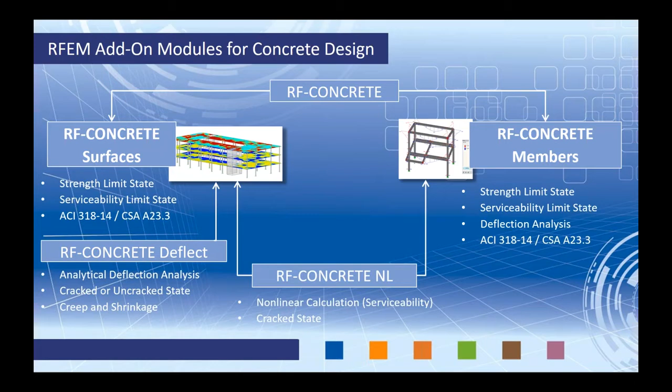And finally, we have the module extension RF Concrete Nonlinear. Now, this is applicable to both the surfaces and members module, and this allows us to run a nonlinear calculation for the serviceability state only in the crack state. So we won't be using analytical equations or factors, but we'll actually come up with the crack section properties and rerun this within the stiffness matrix to account for those nonlinearities. Now, we won't be getting into this today, but just keep that in mind that that is a possibility if you're looking for it.

So we are ready to jump into our example today within RFEM. So for the sake of time, we won't be able to model the structure from scratch, but rather I went ahead and created this two-story concrete building.

You'll notice that we have several surface elements. The surface elements comprise our elevated slabs at both the first level and our roof level, and those same 2D surfaces are also utilized for wall elements, which you can see in the vertical direction.

Surfaces allow you to apply any type of opening within them. This might be some type of garage opening, and we have openings for our doors, windows, and stairs. All of this is accounted for within the analysis.

You'll also see these light blue symbols located at the joints where our vertical walls intersect our elevated slabs. This is what's called a line release. A line release can be placed on any line element within the model, and in particular, we've added them at this joint where the walls intersect the elevated slabs.

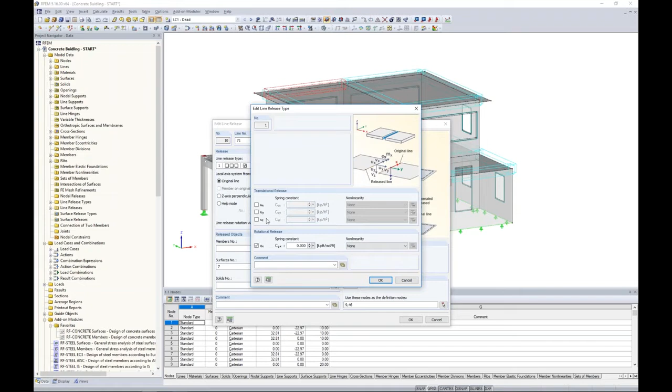If we open up the detail settings, the line release type has completely released the moment, so we will not have moment transfer at that joint. You'll notice we also have translation here in the local X, Y, and Z. Keep in mind these are the local axes of the line element itself.

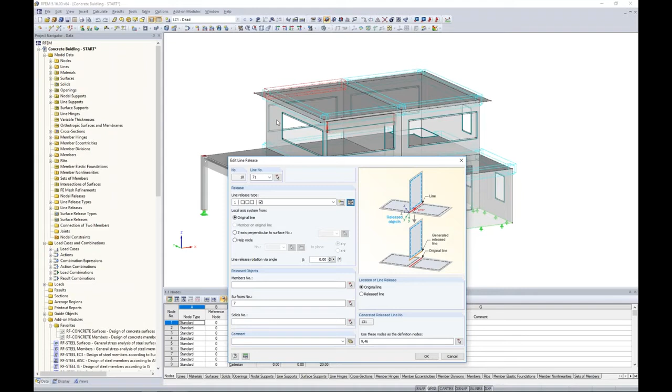We simply apply it to a particular line. We release the objects, and in this case it's surface number 7, which is my vertical wall on the other side. So now we won't get any moment transfer between those walls and the slab elements.

Under the display settings, we can scroll all the way up to the top and turn those off. They'll still be taken into effect in the background, but if they get in our way when viewing graphically, we can turn them on and off within this display option.

Moving on to members, also within this display in our Project Navigator, I'm going to scroll all the way to the bottom. Here we can change the colors in the graphics according to different elements, and the one I'm choosing today is the member type.

The member types are 1D member elements within our software, color-coded because they are different types of members. The first to notice are our columns, which are the member type beam. A beam within RFEM is just any typical type of member, such as a normal beam or normal column, nothing too fancy going on there. That's why these typical columns just have the member type beam.

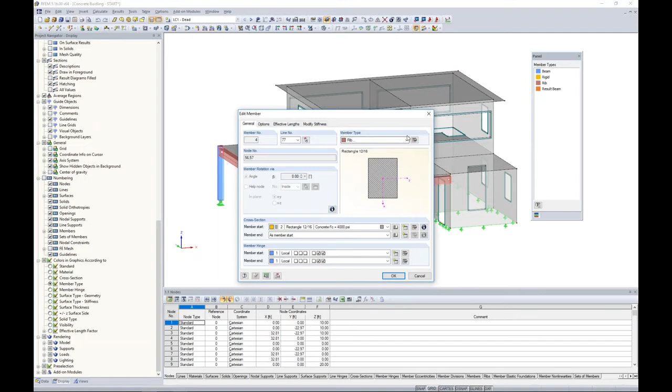Now we have these pink colored members, which refer to rib elements. Looking at a rib element, we can see the member type is set to rib. We can expand the detail settings, and what a rib allows us to do is define the effective width on either side of the beam element with the slab modeled adjacent to it. We can set the effective width as L/6, L/8, or manually type it in.

For this particular member, you'll notice I have a slab on the inside here, hidden behind these dialog boxes, so I've set that effective width to 3 feet, manually typing that in. On the other side we do not have a slab available, so that's set as 0. So rather than being a T-beam, it's more like an L-beam here.

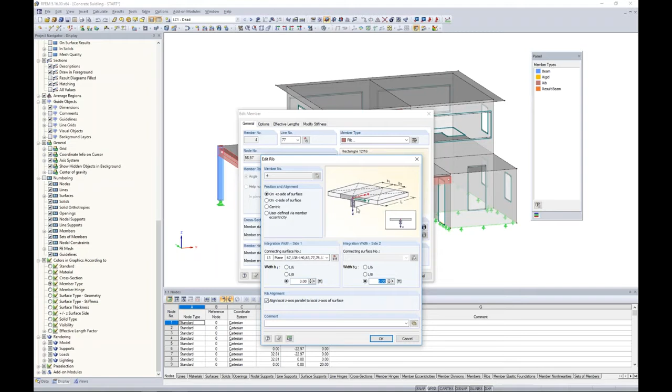We can fully consider the effective stiffness here for the slab element with the beam, and later on we can even design this rib type member in our RF Concrete Members module.

The last type of member I want to point out is something we call a result beam. A result beam is very special in the sense that we're not actually modeling any type of beam member within this model when we're using one. It adds absolutely no stiffness to the structure.

I've placed it above this wall opening, which we can see here highlighted as the wall with the opening, right above it. What a result beam does, if we double click on it and take a look at the expanded settings, is actually integrate the stresses and forces within a cuboid. I've set this cuboid to 2 feet 1 inch in the vertical and horizontal direction, so everything within that cuboid will be integrated and presented to me in a beam-like fashion.

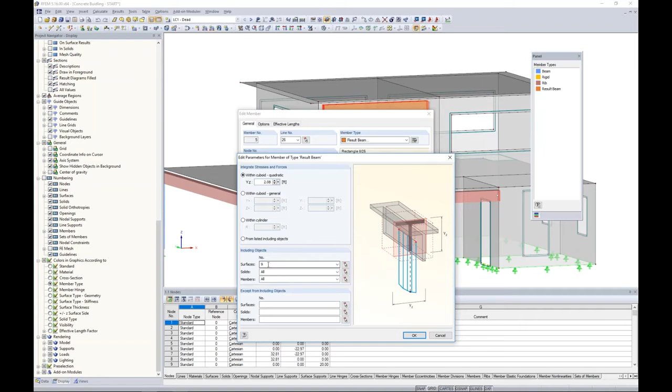We can include only certain objects, so in this case I only wanted to include my wall, surface number 9. So therefore I'll get all of the internal forces, stresses, and deflections above that wall opening, or spandrel as we'll call it, and we'll take this into the RF Concrete Members module later.

Something else to notice about result beams: you don't necessarily have to define it as a concrete member. It could be timber, it could be a steel rod—it doesn't matter because remember, we're not adding any stiffness. But the reason I've set it to a rectangular concrete material for this particular case is because I do want to take it into RF Concrete Members to design it later on, which does require concrete shapes and materials.

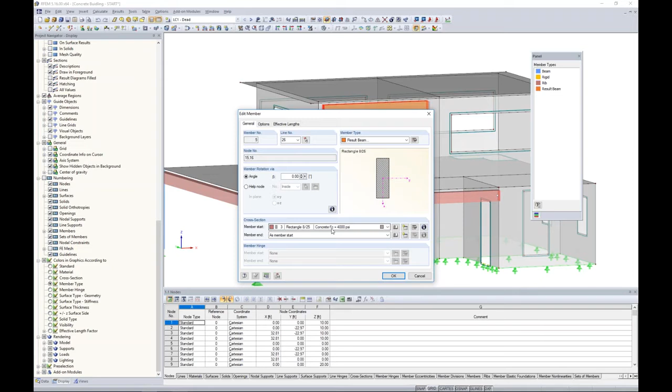Now that we've covered the basics of surface and beam members, I want to talk about I-cracked. I-cracked is simply the gross moment of inertia multiplied by a factor, and this comes directly from table 6.6.3.1.1A within the ACI. The ACI requires us to take into consideration cracked section properties. This factor multiplied by the gross moment of inertia varies for each element, whether it's a column, beam, or surface. By default, the program automatically uses the gross moment of inertia.

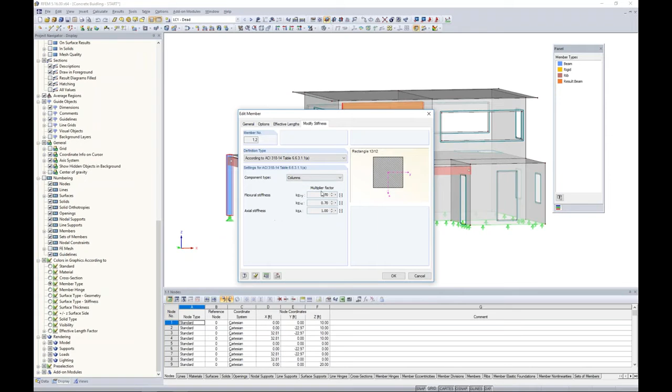So how do we go ahead and change that? Well, you can see here I can highlight both of my columns at the same time and double click them to edit them. Here we have a Modify Stiffness tab. Within this drop-down box, you'll see both the ACI and the CSA because the concept is the same for both standards. Within the ACI, I can use my drop-down box here to select columns, and this multiplication factor, which comes directly from table 6 within the ACI, will be applied to my flexural stiffness. That's how we account for I-cracked.

Now the same thing needs to be done for our rib elements. I can highlight both of them, choose my Modify Stiffness tab according to beams here, and the program is smart enough to recognize what type of element it is from this drop-down. We also would like to do our elevated slabs, so holding down my control key, I select all of the horizontal slab elements, edit the surface, and even for surfaces we have a Modify Stiffness tab according to the ACI for flat plates and flat slabs. We click OK, and last but not least, we have our wall elements.

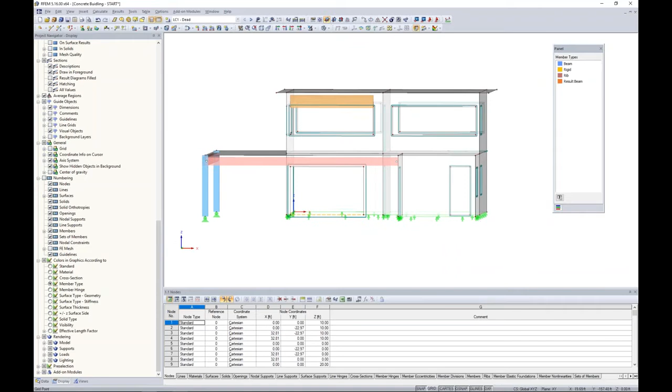I can graphically choose these with my selection box, and right-click to edit these surfaces. Again, under the Modify Stiffness tab, the program gives me the option for walls uncracked or walls cracked. We'll go ahead with walls uncracked for this example today.

Now, you'll notice that I did not apply an I-cracked consideration to my result beam. The reason why is because, remember, we're just creating a summary of the forces and stresses within this wall panel. I've already considered I-cracked for the wall, so there would be no reason to also do it for a beam type element. With that said, if you take a look at the result beam, we don't even have a Modify Stiffness tab anyway to make that change.

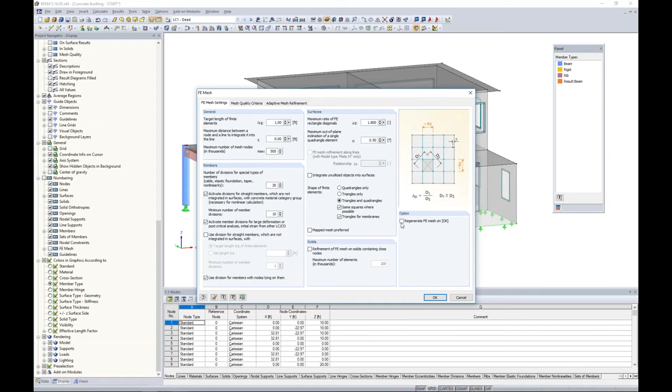Okay, one more concept to take a look at before we look at the loading, and that is our FE mesh. Under Calculate FE Mesh Settings, the global FE mesh by default is set to 1 foot. You can adjust this as necessary, but taking a look at the 1 foot mesh setting for today, we can regenerate the FE mesh, and maybe I'll turn this into wireframe view. You can see the program automatically meshes everything for us—nodes, members, openings, everything is automatically meshed and tied together, so we don't have to take care of any of that manually. Also keep in mind that you don't need to even mesh the model before you run an analysis; this will automatically always be done. I just wanted to give you an idea of what was going on in the background.

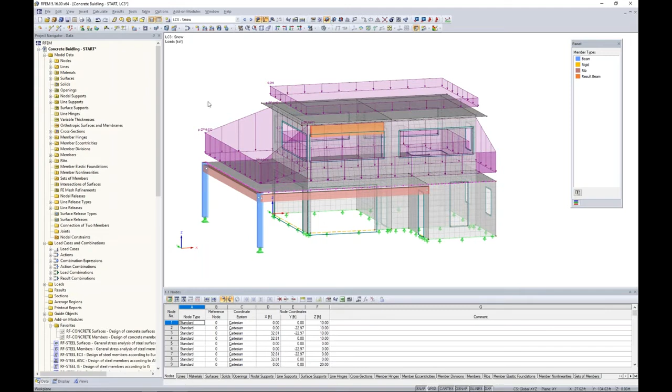Okay, and lastly, let's look at the different loads that I've placed on this structure. I have applied different loads according to dead load, live load, snow load, and so on. When we look at the loads applied to the structure, they're just simple surface loads. For dead load, you can see those acting in the vertical direction on all elevated slabs. Same concept for live load, but only applied at our second level inside the building. Snow load, I've accounted for some high drifts here closest to the wall surface bases, so maybe we're wanting to take into consideration the analysis for high snow loads. You can see those applied here.

Lastly, we have our wind loads. We can see an external pressure being applied in the global X direction, as well as some wind loads, again all surface loads, applied on the inside of our structure as well for an outward pressure. Same concept for wind in the Y direction, except we're just rotating the directions here 90 degrees, so we have a wind in the global Y direction with the surface loads applied.

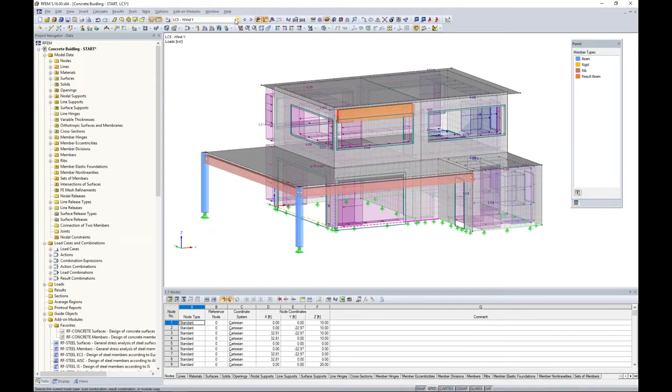Now, jumping to the load combinations, I can open up my load combinations tab. We can see here the program has automatically generated all of my LRFD load combinations, denoted by this orange color, and it has also created my ASD load combinations. Both of these will be used later on for design within the concrete modules.

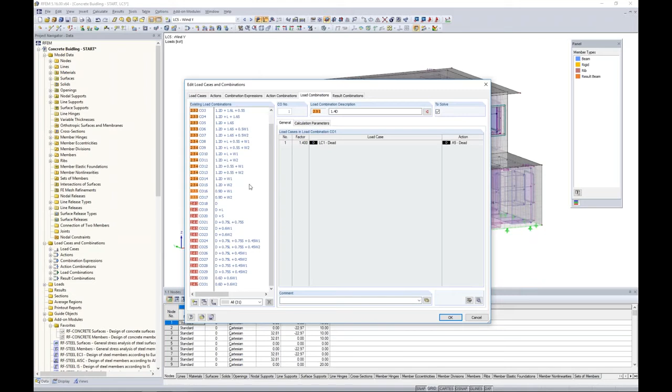If we jump back to RFEM, we'll see all of these same load combinations available in my dropdown, and I can actually see the loads being applied, stacked on top of each other one by one within these load combinations. The load factors are also considered here graphically.

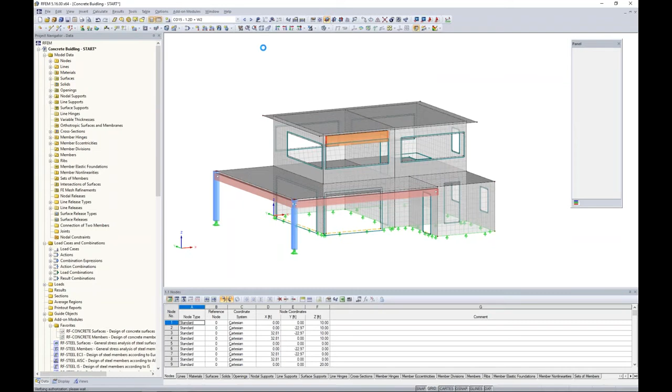So now we're finally ready to run our analysis. What I can do is just go to calculate, calculate all, and the program's going to cycle through first my load cases and then all of my load combinations.

Keep in mind, for load combinations, the default is a nonlinear analysis, taking into account secondary effects such as P-delta. So for every iteration, our stiffness matrix is being adjusted to account for those P-delta effects. We're also taking into account those stiffness modifications from I cracked.

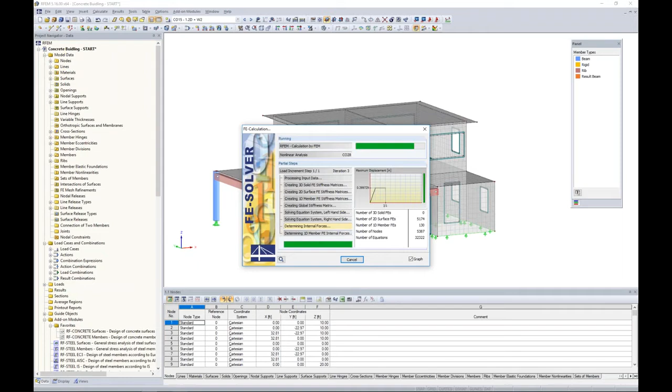Once the analysis is done running, we're presented with our results directly in RFEM. The results are available under the Results tab within the Project Navigator, and we can quickly take a look at our deformations. Turning this into wireframe view, we can cycle through these different load combinations in our toolbar, and for the most part it looks like gravity loads are affecting the structure.

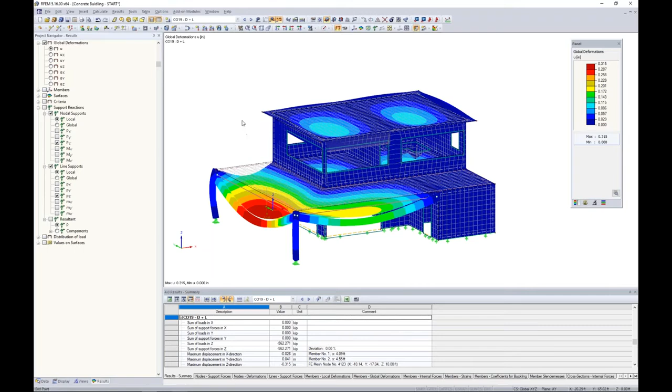Deformations aside, for concrete design we're most likely interested in internal forces, especially for our members. So we can jump to the members tree within our Project Navigator to display the internal forces. For example, I'm looking at the axial loads within my column and my rib members.

We can also take a look at shear loads, maybe we're interested in that for those rib members, and bending moments, of course, which we want to use for our tension reinforcement design, and so on.

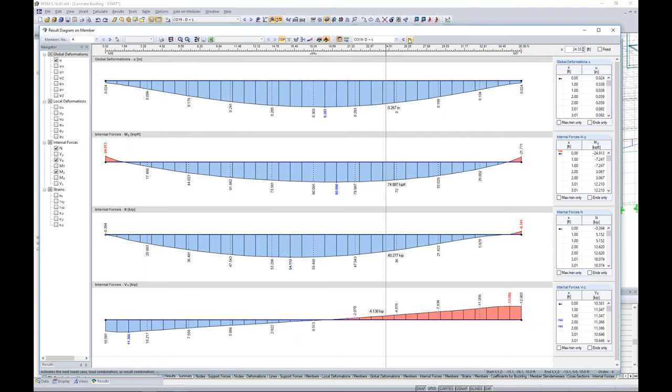We can always right-click on one of these members to go to the results diagram. The results diagram allows us to turn on these internal forces and see a more detailed look at what's going on along the member length. We can also quickly cycle through different load combinations to see how those forces are changing.

The other thing I want to point out is our result beam. Let me create a visibility by selected object of just my result beam. Remember, this is integrating the stresses from my wall element and presenting it to me in a beam-type format—this is actually the area above my wall opening.

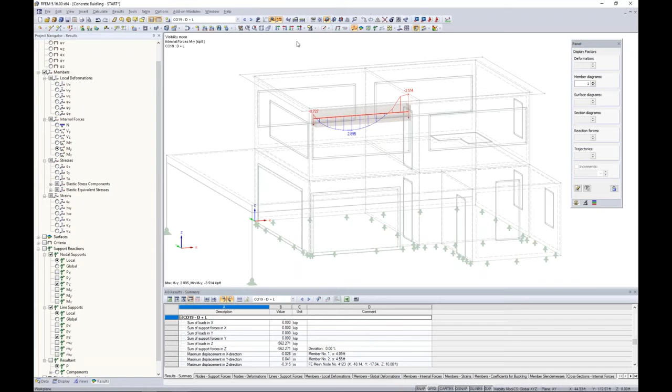I can view normal forces, shear forces, even bending forces all along that wall segment. Again, this is what we could take, not only for the result beam but for all beams, into our own design tools to take a look at the reinforcement design with these internal forces.

The same can be said for support reactions, and let me make this a little more clear here. Our support reactions are given to us within this results toolbar, and we can take this into our own design tools to do the foundation design if we'd like.

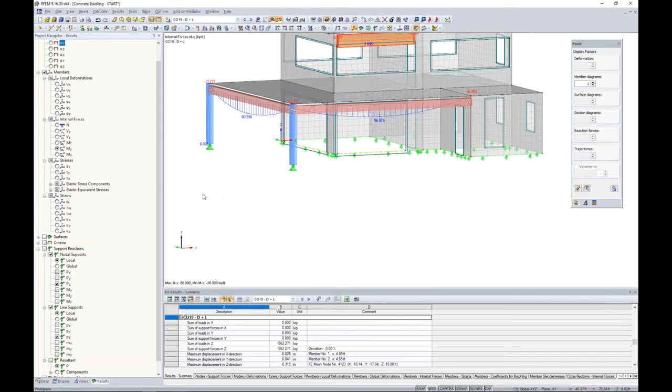So that really summarizes our analysis. Again, I haven't touched any of the add-on modules—this has all been done in RFEM alone, which provides us with a full analysis.

Now we want to change topics and jump to reinforcement design utilizing these add-on modules within RFEM. Going back to my data tab, we can see here the long list of add-on modules available.

This is why we have the concept of 'pay for what you use,' because not all people are going to utilize all these add-on modules. Well, we can always right-click and move a module up to the top of the list by selecting it as our favorite.

Also, under the add-on modules option at the top of the screen, they're categorized a little bit better, so we can see design by concrete and launch the RF Concrete Members module.

Now, when I say add-on module, it's nothing more than a dialog box available within RFEM itself. All of my loads, my load combinations, my cross sections, my materials are all brought in from RFEM, the main program, into this add-on module.

The only thing we need to define here is a little more information about our reinforcement specific to the ACI standards, so that the program can go ahead and design that for us. The first thing to note here is we want to choose the standard.

So you'll see in this drop-down box we have both the ACI and the CSA standard, as well as Eurocode and a couple others. We'll choose ACI for today.

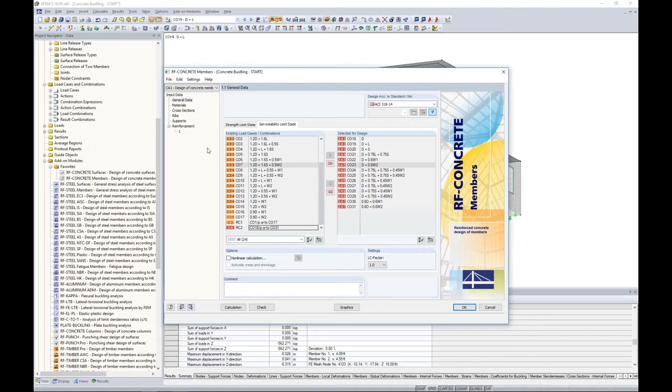Now we just simply need to move down our list here from top to bottom. So moving on to materials, concrete 4000 PSI is brought in from RFEM. Our reinforcing steel is set to grade 60. Material properties are all given to us here, not too much to change.

The cross sections, same concept. These are my cross sections directly from the RFEM model. Now I know it's a little difficult for you guys to see, but as I click through these different cross sections, they are being highlighted in the RFEM model behind me, so I can see exactly which cross sections are located at which parts of the model.

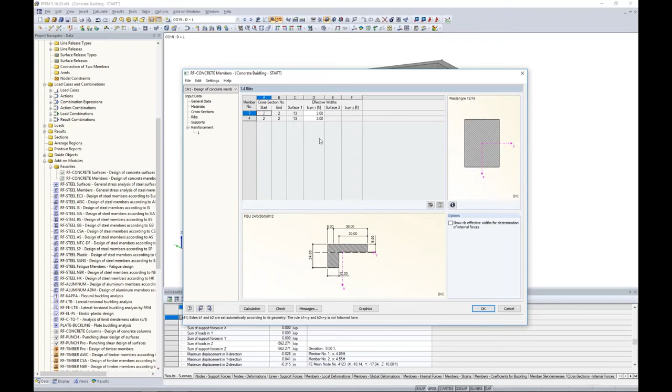The ribs tab is those rib members that we created with the effective width. So remember, I defined an effective width of 3 feet only on one side of my rib member. That's all brought in from RFEM. Now this is important because we can do the reinforcement design of this effective width section here.

The supports tab is utilized by first graphically selecting here a couple nodes. So I'm going to choose both the nodes at either end of this rib beam here in the front of my structure. The reason for that is I want to define my support width, which in this case are my two columns. My columns are 12 inches wide, so we can type in 12 inches for the support width.

Is the column a direct support? What's nice is that this picture updates to let you understand exactly what you're selecting. So is the column underneath the rib, or is the rib framing into the face of the column? In our case, we'll assume the rib is framing into the side of the column.

Is it a monolithic connection, yes or no? And is it an end support? In both of our cases, we'll choose this as an end support. So the intent of this table allows us to reduce the shear forces in the support area according to ACI 9.4.3.2.

The code tells us that we can actually consider the rib element at the face of the column, or even more so a distance D away from that face, D being the depth of the rib. So the shear forces at that location will be used for the shear reinforcement design. The ACI allows us to do that, so in order to not over-design the shear reinforcement, we can activate that option here.

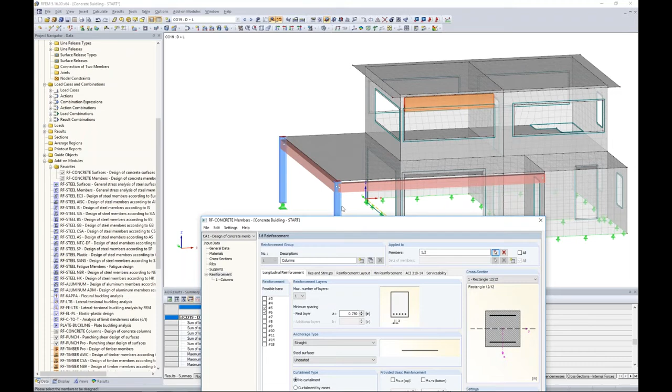Our rib member is going to have significant bending at the center, but much less bending at the end. So what you can do is set different curtailment so the program can optimize where to put that longitudinal reinforcement in different zones. The option for no curtailment will use the same longitudinal reinforcement throughout the entire length of the beam.

Ties and stirrups, same concept. We just want to choose the possible bars here. For these columns, I'm going to choose number 3s, and we're going to use uniform spacing throughout, which is the default option. Now, the program can also take into consideration the max stirrup spacing according to the ACI standard, so it will either flag us or design it to make sure we're not exceeding that particular code check within the ACI.

The reinforcement layout. The first thing to set here is the concrete cover. The ACI standard refers to table 20.6.1.3.1 for concrete cover, and for number 5s or smaller that are exposed to weather, the code tells us that 1.5 inches is adequate. So assuming we're using number 5s here, we'll just keep this as the default of 1.5 inches. If the program came up with number 6s for my reinforcement, maybe I'd want to go back and adjust this to something more like 2 inches.

The reinforcement layout. Remember, we're designing our columns here, so a reinforcement layout shown in this picture on the right is not ideal for a column. We're going to have something more like biaxial bending, we could bend about either axis. So we want to certainly make sure we have bending reinforcement on every face. For that, we can use this drop-down box to choose the option uniformly surrounding. This looks much more efficient and effective for a column member.

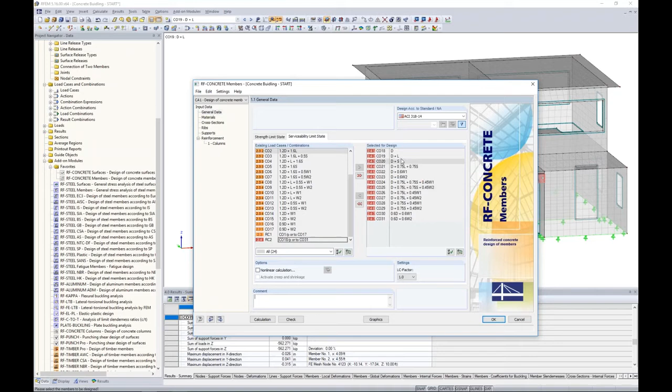Now, lastly, we have our Serviceability tab. Keep in mind, this Serviceability tab is only available because back under the General Data tab and the Serviceability Limits, I've actually utilized my ASD load combinations. If I did not have load combinations over on the right side of this dialog box, I would not see this Serviceability tab. But today we are designing serviceability according to the ASD load combination.

So there are two considerations when it comes to serviceability: cracking and deflection. With cracking, the first thing to specify is the limit value for allowable crack width. Utilizing this first option, limit values, my drop-down box has a few default options, and this comes from the ACI committee's research, putting together recommendations depending on where your structure is located and how it's going to be used. For example, water retaining structures are going to have a significantly lower allowable crack width of 0.004 inches compared to a structure with a protective membrane or located in a dry air environment.

For today, let's assume cracking is not such a concern for this structure. We're in a very dry environment, we don't expect to see very much cracking, so we'll just set the limit values as 0.016. Now, user defined, you can manually type in the allowable crack width as well.

Below this are two different checkboxes: design without direct crack width calculation according to Chapter 24. The ACI does not specifically give us any type of equation or reference when it comes to the actual crack width. Instead, it tells us that we must limit the reinforcement spacing in order to control cracking. So by leaving this checkbox checked, we will check the spacing of the reinforcement to make sure we're adhering to the ACI standard.

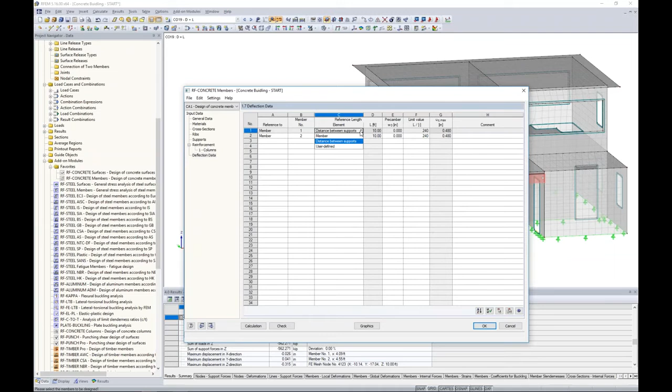Under the deflection data, not much to do here because the program already recognizes that we need to add both columns to this table, member 1 and member 2. The reference length is set as the distance between the supports, the full 10 feet. You can also modify this with these drop-down options. If we had a pre-camber, we could put that in.

And finally, the limiting values. The drop-down box has a few options directly from the ACI standard, or you can type in your own user-defined value. Utilizing L/240 again from the ACI, I'm telling the program that I cannot exceed a deflection of 0.48 inches. So it will compare the demand deflections from our analysis to these limiting deflections and give us a capacity ratio for serviceability.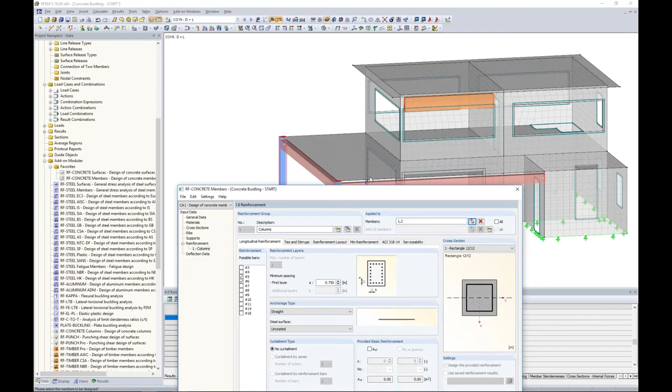So that was a bulk majority of our input information within this module. Now keep in mind, this is only for the columns. So what I'd also like to do is design my ribs and my result beam at the same time. We can do all of this in one continuous step by simply creating a copy of my reinforcement group.

So now my columns are defined here twice. All I need to do is go to a second group, and we'll rename this to ribs. Now for the members, I need to graphically choose my rib members that I'd like to apply this to. As for the rest of these tabs, most of this will remain unchanged.

For example, the longitudinal reinforcement will still let the program optimize between number 5s or number 6s. The ties, maybe I'd like to increase this to number 4s. I expect to see higher shear here, of course, in comparison to my column, so we'll increase this to number 4s.

And let's use different zones. So the program will optimize the spacing in 3 different zones. Areas where we have higher shear will have closer tie spacing. Areas where we have lower shear, of course, will have further away tie spacing.

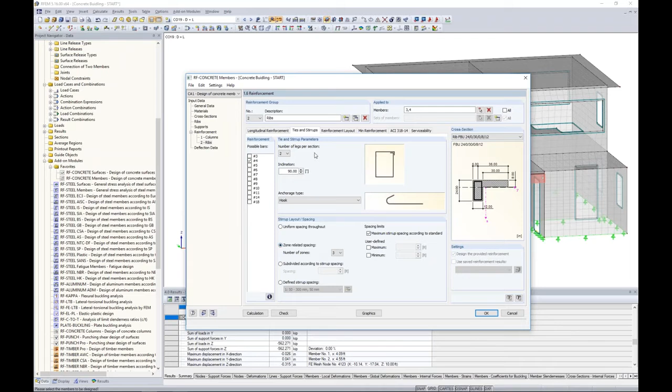The reinforcement layout, the cover is fine, but the reinforcement layout is not correct. We certainly don't have a column situation where we need uniformly surrounding reinforcement. So instead, we're going to choose symmetrical distribution.

You'll notice now we're giving reinforcement at the top and at the bottom, which is more beam-like behavior. For rib elements, we now have the option to distribute the reinforcement over the complete slab width. So we're also going to extend this longitudinal reinforcement over the effective width of our slab.

So it's pretty powerful in the sense that we can design these rib elements directly within this module too, taking into account that effective width that we input in the RFEM model.

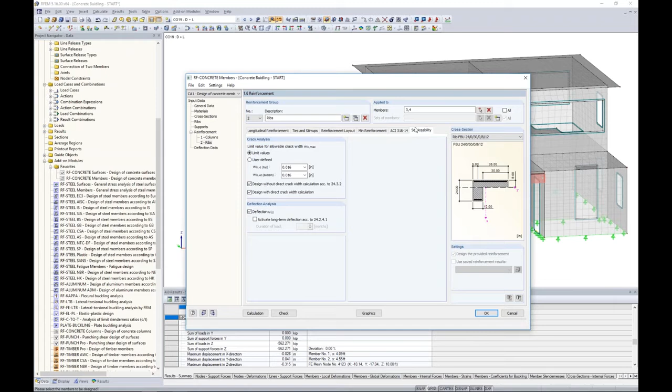Now, as for the rest of these tabs, essentially we can leave everything the same. Even for serviceability, if I go to my deflection data table, members number 3 and 4 were added. My allowable deflection will now be around 1.5 to 1.7 for these rib members, simply because they are longer members.

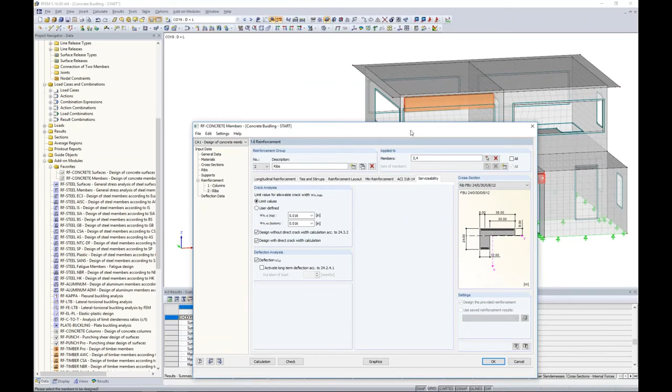Okay, and finally, we have our result beam up here. Now remember, we're just designing the upper portion of this wall above the opening as a spandrel, and we do so by mimicking that it's a beam type element. So creating a copy now of my rib reinforcement group, you can see here now I have columns, ribs, and my third option, we can rename this to spandrel.

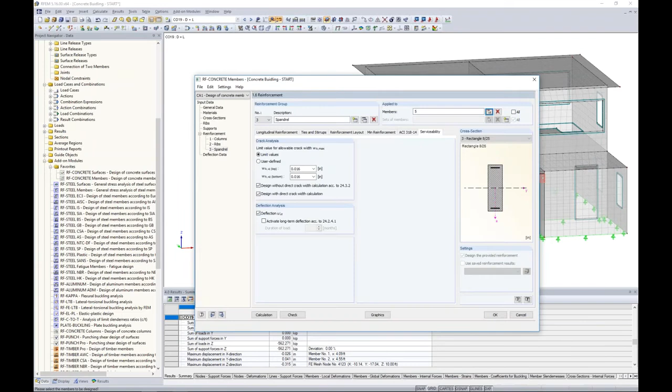Here I can select my member, my result beam graphically within the RFEM model. And jumping back to my longitudinal reinforcement, this looks fine. My ties and stirrups, maybe we'll jump back to number 3s here with uniform spacing. Everything else remains unchanged. Even the reinforcement layout, by the way, will look the same as our rib members, but our cross section was updated here, with top and bottom reinforcement.

The only thing I'm maybe not so concerned about is my serviceability with deflection consideration. You can uncheck these options for different reinforcement groups. So I still want to check out my cracking, but I don't really care much about my deflection. I can simply uncheck that, and now that member will not be included in the deflection data table here.

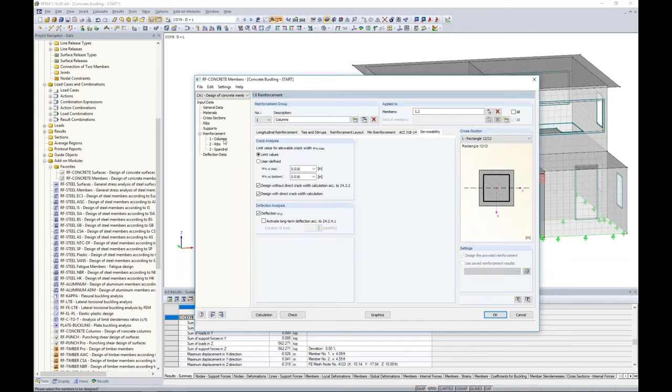Now we've finally defined all of our reinforcement settings for our members, and we can run a calculation. All this is doing is pulling the internal forces from RFEM into this add-on module, applying the ACI equations to give us our actual reinforcement details for each member. And you can see it solves fairly quickly.

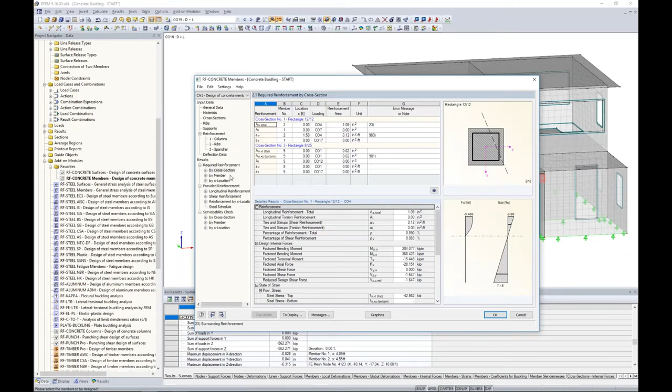So now we're presented here with our results in table format. The required reinforcement is given first here, and we can check it out by member. Again, these tables are synced up in the background with the RFEM model, so we can see exactly where we're at within this structure.

Taking a look at our rib members in particular, we'll see the required reinforcement based on the applied loads for the AS top given as such. Now AS bottom, this is all longitudinal reinforcement. We're also given our requirements for shear reinforcement and torsion.

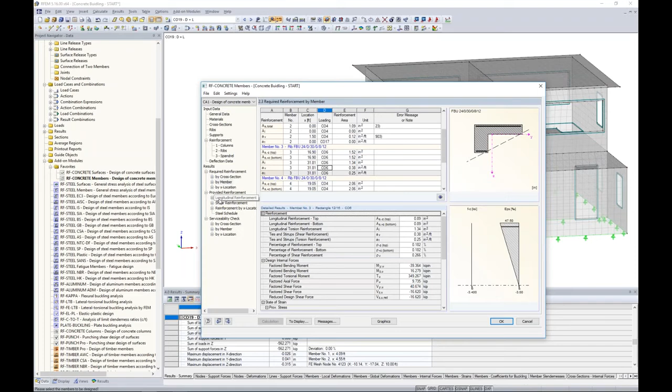So required reinforcement is nice, this is good to know, but rather we're probably interested in, well, what rebars did the program lay out for these particular members in regards to the settings we previously defined? Well, this is where the provided reinforcement tables can be useful. Here we can see these same members defined.

For example, we're taking a look at the longitudinal reinforcement for my columns. I can take a look at my rib members here, and we can zoom in to see the longitudinal reinforcement applied at the bottom, at the top. Shear reinforcement, same concept. We can see our ties, our stirrups placed along the member length, 31 number 3s at 4 inches on center.

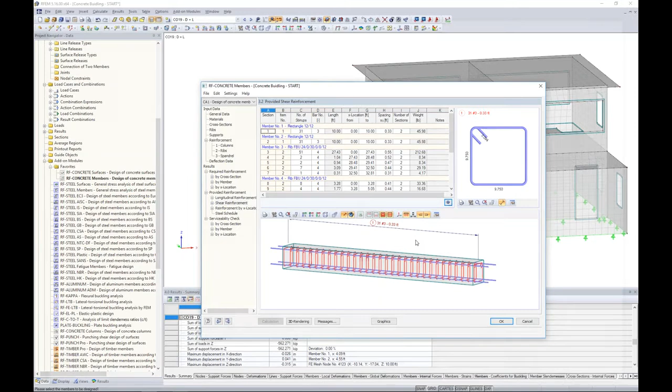Now, for these 3D drawings, you can always double click on it, and up pops a nice rendering here of exactly what our reinforcement looks like for both the longitudinal and the ties. If you want to make quick changes, for example, I really would prefer to use number 4s rather than number 3s.

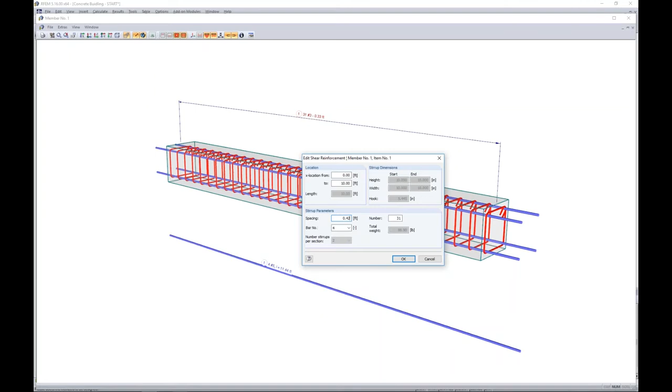I've decided, well, I don't necessarily have to go back to my original input data. I just simply double click on this call out here, and I can change the bar number to number 4s, and maybe I increase my spacing to 0.425 feet on center. I click OK, and the program automatically updates the picture.

I can exit out of this picture, and when I click into another table, the program says, wait a minute, you made a change. I need to quickly recalculate this to make sure you're still meeting all the ACI limitations.

So I've made that change to my shear reinforcement for my column. It's reflected here with 24 number 4s, but I am getting a note now, which I can read either under my messages or down here in the lower dialog box. It says the bar spacing is greater than the maximum spacing, so that's telling me something is not adhered by the ACI standard. So maybe I need to go back to my number 3s or decrease my settings there.

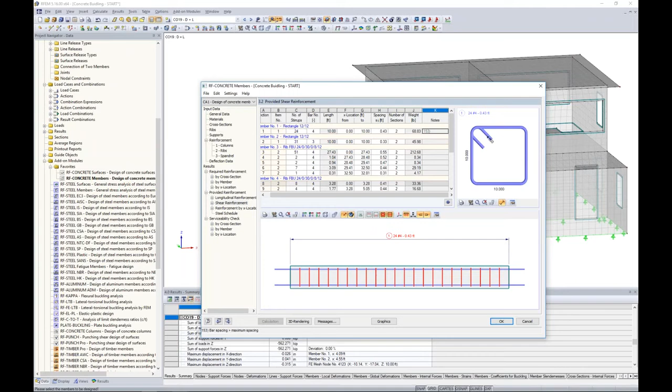Now, lastly, we have our serviceability check. Remember, we were checking deflections. We were also checking the spacing of our reinforcement and the crack width. So ultimately, for our different cross sections and members, we're getting a capacity here for serviceability.

It looks like in this case, the deflection is controlling at the mid-span, denoted by this big red arrow for our rib member, and we get a serviceability check of 0.94, but we're still less than 1.0, so we get our nice green smiley face here.

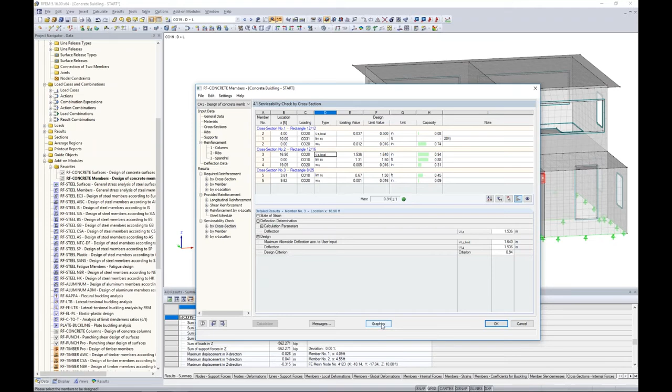So the tables are nice, but it's also beneficial to see what's graphically going on within our module or within RFEM. What we can do is click on the graphics button down at the bottom, and now we are back within RFEM, but we're still technically in this add-on module. You can see that we're in RF concrete members, so this is all my reinforcement results details from the module.

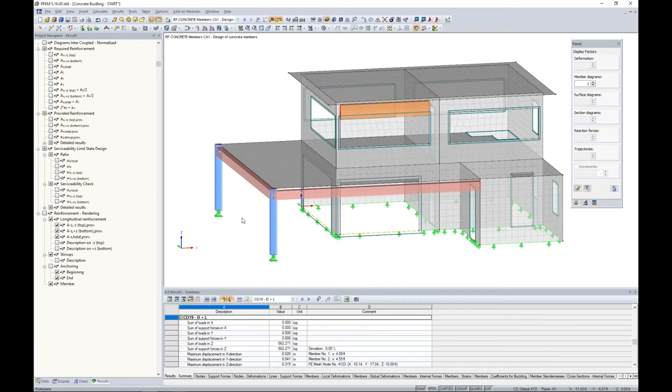Now, focusing in on a rib member, for example, we'll highlight it and create a visibility by selected objects. Let's turn this into wireframe view and zoom in here a little bit. For this rib member, we can display a diagram of our required reinforcement at the bottom of this member. So this member is in positive bending moment. We need reinforcement on the bottom, obviously, up to 2.06 inches squared per foot.

So that's just the required reinforcement. Well, I can overlay on top of this the provided reinforcement. This is what the program has determined to put into this beam member with our number 5s, and it comes out to 3.88 inches squared per foot. You can see here that the provided reinforcement should always be greater than the required reinforcement, otherwise we should be a little concerned with our concrete design not meeting the minimums.

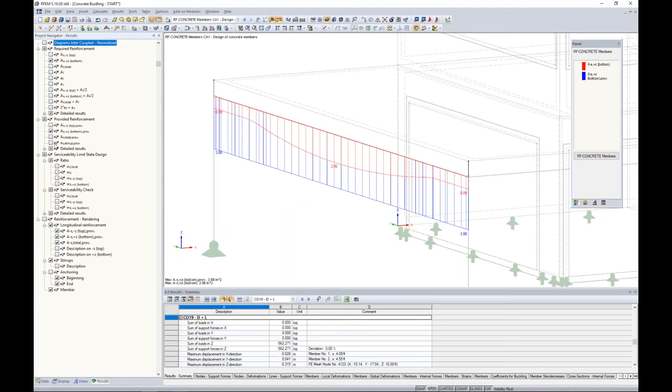Now you can go ahead and display all these different diagrams. What's also beneficial is we can display the rendering of the reinforcement for both the ties and the longitudinal reinforcement directly within the model. So we can see here, even with these rib members, we're able to see the longitudinal reinforcement within the slab. Shear spacing, our three different shear spacing zones are displayed here. Now any of this can be added to our printout report for recommendations on how the overall rebar reinforcement design will be done.

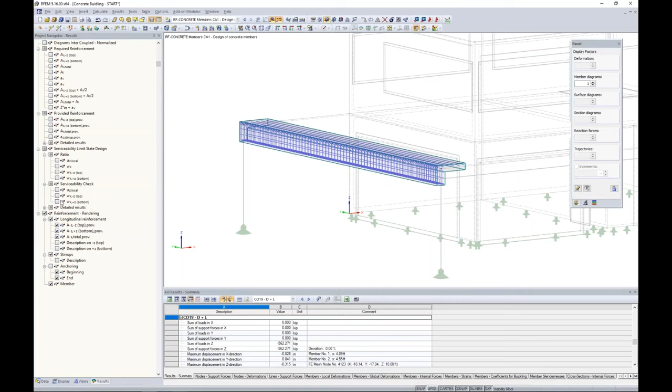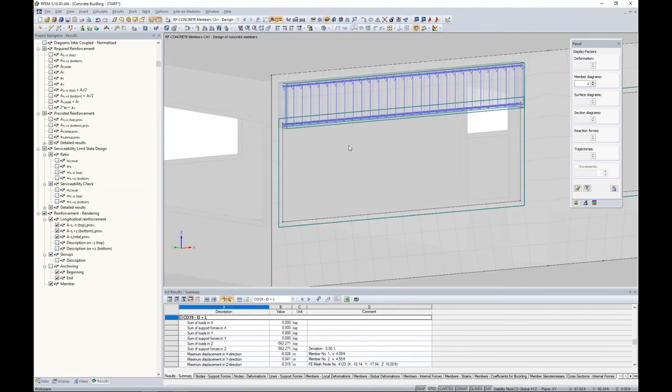Okay, so the other thing to quickly point out is remember our result beam. We're going to cancel out this visibility mode, and maybe we highlight our result beam here along with our wall panel, create a visibility by the selected object. So here we can actually see the reinforcement above that wall opening. It was designed like a beam member, so we have our longitudinal reinforcement shown here, and our stirrup shown, and this is all meeting the design demands of this wall panel above the opening. So again, this is how result beams can be utilized along with surfaces.

Okay, so now we have completed the member design. We're also interested in the surface design. For this, I'm going to cancel out my visibility mode, and we'll turn to the normal view here of RFEM, and we'll jump to RF concrete surfaces.

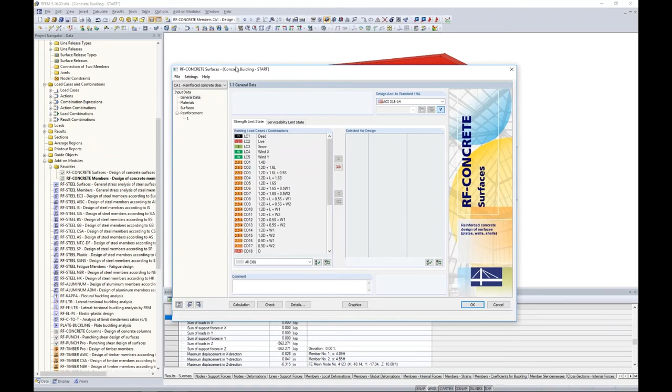So this is our second add-on module today. Now this add-on module is truly almost identical to RF concrete members. Once you grasp the handle of one module, you'll certainly understand what's going on in the other.

We're going to choose the ACI standard from our drop-down box here. The strength limit state design, we will choose our LRFD load combinations, and for serviceability, we will choose our ASD load combinations. Under the serviceability limit state, this is where we can go into these edit settings and activate the RF concrete deflect module.

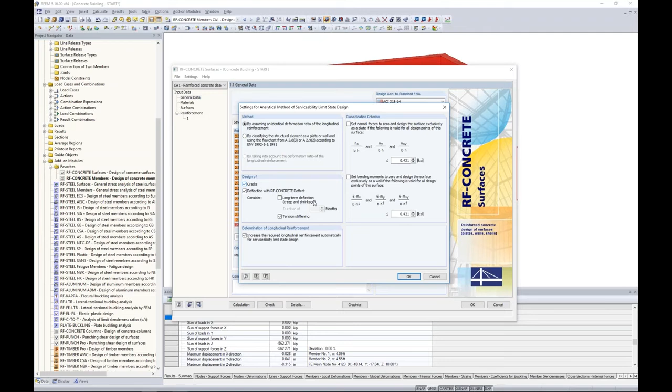So this is the module extension that allows us to check deflection considerations for our 2D surfaces. Now you can also activate long-term deflection or turn it off here, and the design of cracks will also be included. We also can get into nonlinear analysis with the module extension RF Concrete Nonlinear, which we won't be doing today, but this is where you also activate it for the serviceability limit state design.

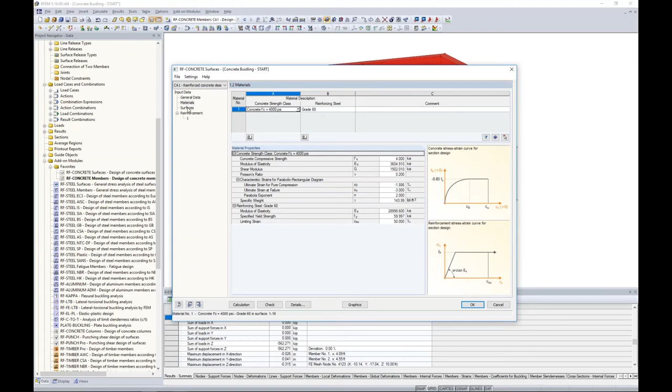So again, just moving from top to bottom with our tables here. Our materials, 4,000 PSI, grade 60 reinforcing steel, everything looks great there. The surfaces table is really effective for our serviceability design. This has information on our deformation and crack widths according to the surfaces.

So the first tab here, deformation analysis, is only available because I have activated RF Concrete Deflect. Here we type in our limiting deflection ratio. You can see the default is set at L/250, so I can manually change this deflection ratio here as well. As far as L, this will be measured by the minimum boundary line, the maximum boundary line, maybe a user-defined value, or what I'm going to do in this case is tell the program I don't want any deflections of my slabs or my surfaces to exceed 1.0 in this case. So that's the absolute deflection here. Now you can individually set deflection ratios for each surface, or you can apply them all at one time.

The limit of crack widths, this should look very familiar. This is exactly what we just saw with the RF Concrete Members module. We can set our limiting values here according to the ACI committee for a dry air structure of 0.016 inches. We can design the reinforcement with spacing considerations according to Chapter 24, as well as run the Gergely-Lutz equation to give us our actual crack width and compare it to the limiting value set here.

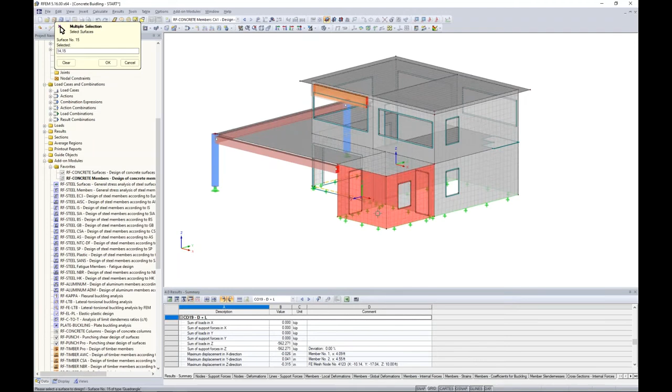So nothing different here. Moving on to reinforcement. The first thing we want to do is again define our reinforcement group. We're only going to have time to do our walls today, but keep in mind the design of the elevated slabs is identical to what I'm about to show you. You just can create a second reinforcement group if you'd like. So this is not going to apply to all surfaces, but rather I'm just going to design these two outer perimeter shear walls here. So we can select them graphically, surfaces 14 and 15, and I click OK.

The reinforcement ratios have some default settings here. For example, maximum reinforcement percentage is set at 9%. The ACI standard actually tells you that for surface reinforcement, we're more concerned with the strain being less than 0.004 rather than a specific percentage called out. But you can adjust this percentage as a user in order to make sure we have a strain that's below what the standard tells us to.

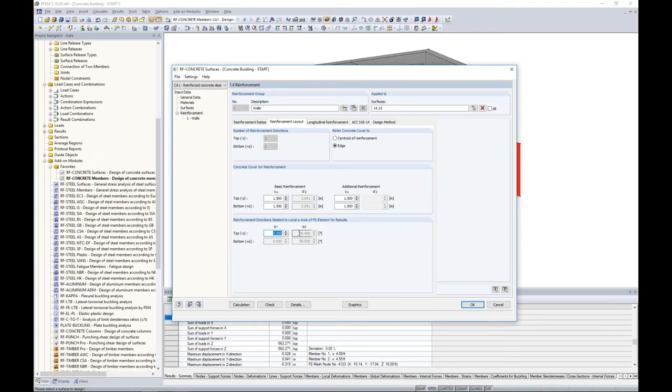The reinforcement layout is to specify the cover. I'm going to specify the cover from the edge of the slab or the edge of the surface to the edge of the rebar. And for this, just like my concrete members, I'm going to set this all as 1.5 inches. We will design both transverse and longitudinal reinforcement for surfaces. If you have any type of specialty structure where you don't have a complete 90-degree angle between those two directions, you can adjust this angle to something else, so it doesn't necessarily have to be 90 degrees.

Longitudinal reinforcement for my wall elements - I know I want to apply number 5s at 12 inches on center. That is my provided basic reinforcement I'm going to put in here. I can input that information for the top and bottom as well as the diameter of my rebar, but we can also utilize this helpful tool. With this tool, I can choose all options for top, bottom, and both directions. I can specify my number 5 rebar diameter, which is 0.625 inches, and set my rebar spacing as 12. Once I click OK, the program will automatically calculate my reinforcement area and set my diameter according to those settings, so nothing further to do with my number 5s at 12 inches.

Now these next two settings are interesting. The program is going to first run through the ultimate or strength limit state design. If it determines my number 5s at 12 inches are not adequate, it will automatically increase this reinforcement - this will be our new required additional reinforcement. Once the strength limit state design is done and we move on to serviceability, what do you want the program to use? Do you want it to use our number 5s at 12, or the required additional reinforcement? All of those options are available within this drop-down box. I'm telling the program, if number 5s at 12 are not adequate, let's use whatever the program suggests I need to additionally add to these wall segments. Same thing with the check of shear resistance - apply the greater value from either the required or provided reinforcement.

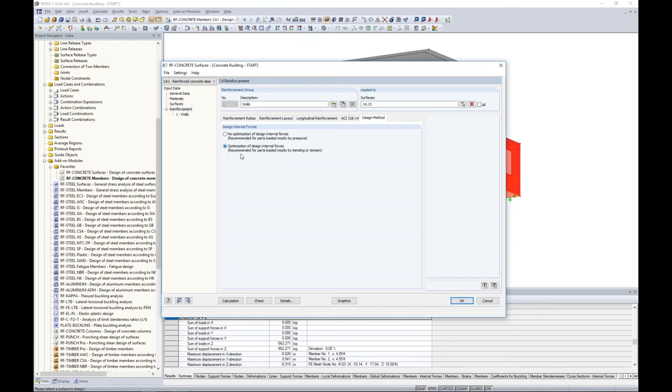The ACI tab just has some references directly to the standards. For example, we want the minimum longitudinal reinforcement for walls according to Chapter 11. Minimum shear reinforcement is given here, as well as the nominal shear strength of our concrete according to Chapter 22. Strength reduction factors from Chapter 21 are given by default directly from the ACI, but you can adjust those here. The design method - we'll leave this as default. We have optimization of design internal forces, and the parentheses gives you the information you need: this is recommended for parts loaded mostly by bending or tension, in comparison to parts loaded by pressure, so we'll leave this option here.

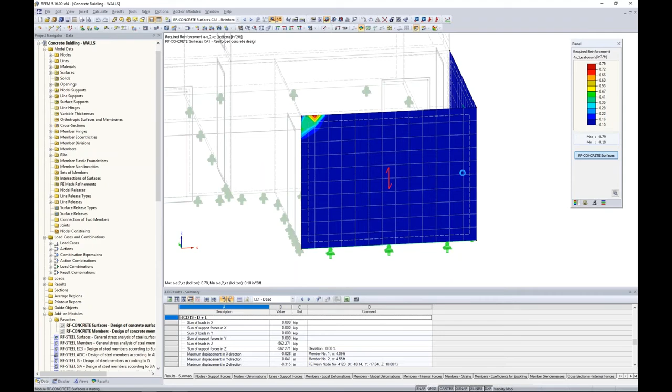Now we're finally ready to run our calculation. For the sake of time, I'm going to jump to an already solved model here, because we do have several FE elements now, which is much different than our members, so it takes a minute to solve. For the sake of time, we'll jump to the results, which are provided to us within this add-on module with the results tables.

The first thing I want to look at is required reinforcement by surfaces. Once I run my calculation, I see my 2 surfaces listed here. The first one is surface number 14, on this far side back here. Surface number 14 shows me my required reinforcement within this column - this is just what's required based on the applied forces, no problem. Basic reinforcement is my number 5s at 12 inches - this is what I told the program to input for the basic reinforcement. My third column is all zeros, because my number 5s at 12 inches are completely adequate for this particular wall, so I don't need any additional reinforcement. My number 5s at 12s are fine.

I could maybe even consider increasing the spacing or decreasing the bar size to be a little bit more competitive here.

Now, looking at wall segment number 15, it is a very different story here. Looking at the required reinforcement, I have values clear up to 0.95 inches squared per foot. That's a whole lot of reinforcement.

So my number 5s at 12 inches listed in my second column here are not even going to be close to this. In my third column, the program's telling me you need to put quite a bit more reinforcement into this wall. Then if I take a look at my shear reinforcement design, the program's giving me a not designable message. It says down at the bottom, the shear resistance cannot be checked. The cross section is entirely cracked.

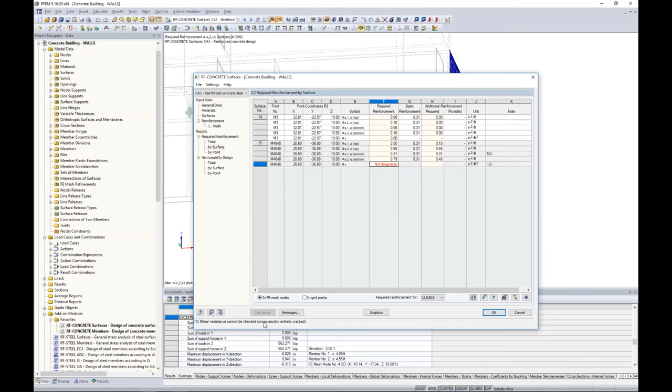Well, this raises a red flag to me. These two wall panels are very similar. Why is wall number 14 passing with flying colors? Everything is totally content with the number 5s at 12 inches, but then when I look at number 15, it's not even close. It's failing by quite a bit.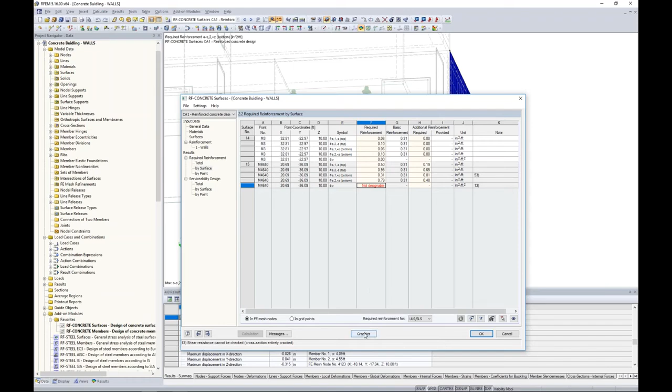So this tells me that I need to maybe take a look at my graphics within the RFEM model here to see what's going on. Remember, I'm still in this add-on module, RF Concrete Surfaces. I'm just viewing my results graphically here back in RFEM.

So we'll take a look at our required reinforcement, which I can choose within my tree here. Now I'm viewing the required reinforcement for both the top and bottom and in both directions. We can see the direction indicated by the red arrows there. You'll notice as I cycle through these, the wall panels themselves, for the most part, require very little reinforcement.

But we definitely have a problem up here in this corner. Very, very high reinforcement is required. So this tells me that we have an issue called a singularity.

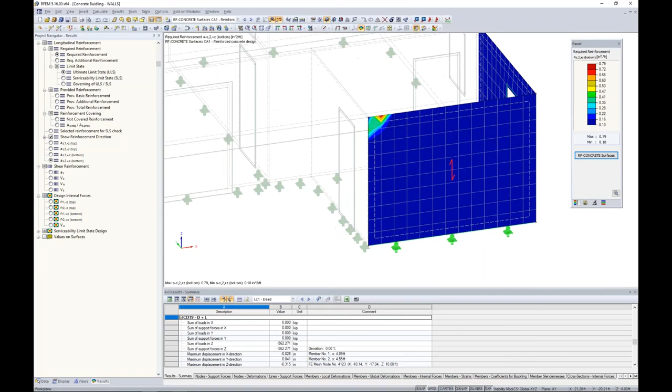Now, if we look at this corner here of this wall panel, we have this additional wall panel framing in from 90 degrees. Remember, we have our rib member framing in all to this teeny tiny FE mesh point in the corner. Well, in reality, this is not just an issue within RFEM, but with all finite element analysis software, that the load isn't going to be distributed at this one single little mesh point, but rather we're going to have better load distribution in real life.

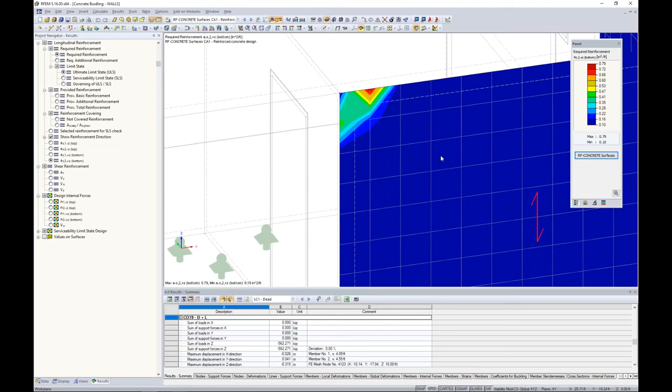So what can we do in our model to take care of these high peak areas? Well, the first thing to know is that my FE mesh elements here are pretty large at 1 foot. So maybe I want to refine my FE mesh at this corner point.

Well, I can do this by right-clicking on the node. I can edit or create a new FE Mesh Refinement. I choose the definition type here, and you'll notice the program already chooses the node option because that's what I've highlighted in the model. I'm going to give the FE Mesh Refinement a radius of 3 feet.

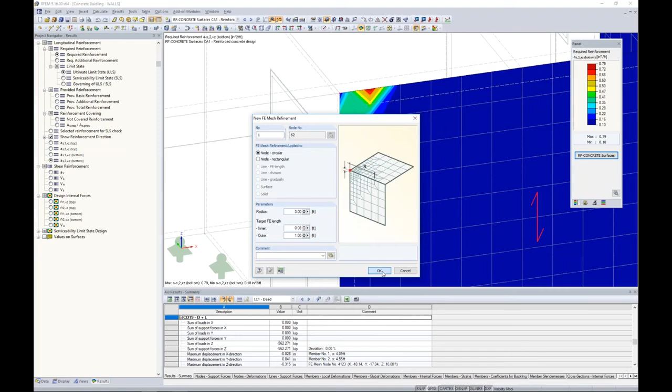Now, on the inner side of this FE Mesh Refinement, I want 1 inch. And then as the outer mesh refinement, I would like it to transition back to my global settings of 1 foot. And I click OK. The program tells me it needs to clear the results.

So now we're presented with this FE Mesh Refinement symbol here. I can go to Calculate, Generate FE Mesh, and maybe if I hide my objects in the background, we zoom in here, we can see that the FE Mesh is much smaller at this corner now. Then it transitions nicely back into that 1 foot setting. So some nice automated features here.

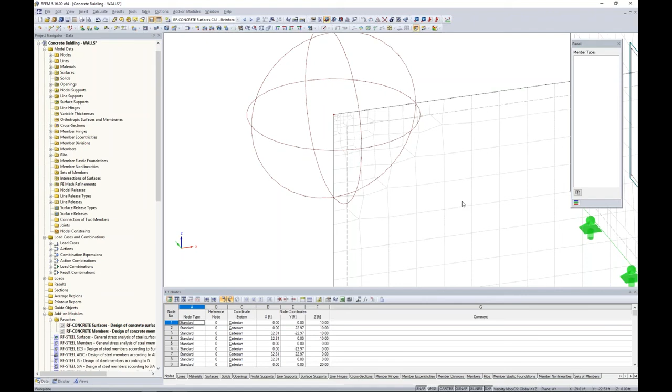But because we've completely changed the FE Mesh, the program does need to rerun the analysis way back in RFEM. Our internal forces are inevitably going to change when we make changes to our FE Mesh. So I'm going to go to Calculate, Calculate All, and again, for the sake of time, we'll just jump to an already saved model here.

So now I'm presented with my results after I place this FE Mesh Refinement in RFEM. We're back to viewing the forces within this wall segment. I'm looking at the shear in the local X direction, for example. Well, I can see now that I just have this tiny little FE Mesh element that has really high forces.

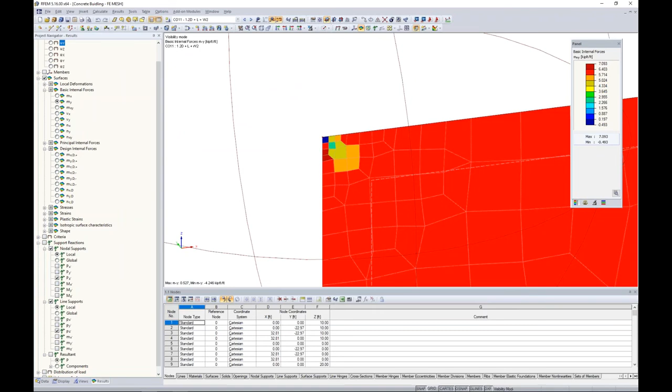The same thing can be said for all of these internal forces that can be displayed. This corner is certainly a problem, but at least we've narrowed it down to a much smaller FE mesh point here rather than the entire 1 foot by 1 foot corner. So we've refined the FE mesh, but how do we get better distribution over these high peak areas? Well, under the Data tab, we have a nice feature called Average Region.

So if I right-click on Average Region to create a new average region, this allows me to specify which surface I want to apply this average region to. I can click on the wall panel itself, surface number 15. I want a circular average region, so the picture updates nicely here. I choose where to place this average region, which we'll place right here in the corner, and the nodes are automatically entered with the correct coordinates into this dialog box. The dimension will be 3 feet, so 1.5 radius is what we'll consider. The program is going to automatically average out the results within this average region. So I can click OK.

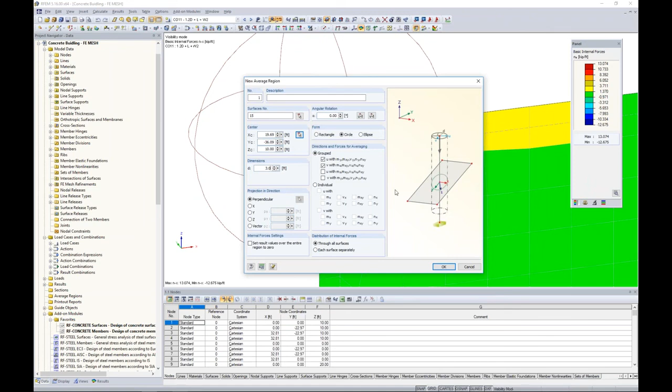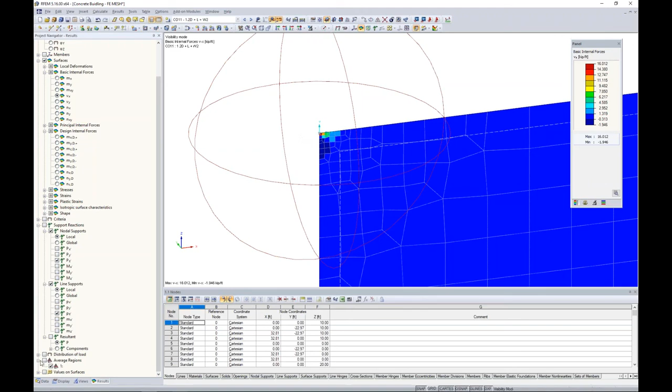Now I don't even have to rerun my analysis. The program can automatically average out those regions. So now when I go back to my internal forces for shear, without the average region, we have a shear force of 16 kips per foot. Now I can activate this average region at the very bottom of my results panel here. My shear went from 16 kips per foot to 0.44. So that is a significant drop.

Average regions can be incredibly useful for regions where we're dealing with singularities. Now the same goes for any one of these internal forces. So we've taken into consideration better load distribution, or averaging out those high peak areas.

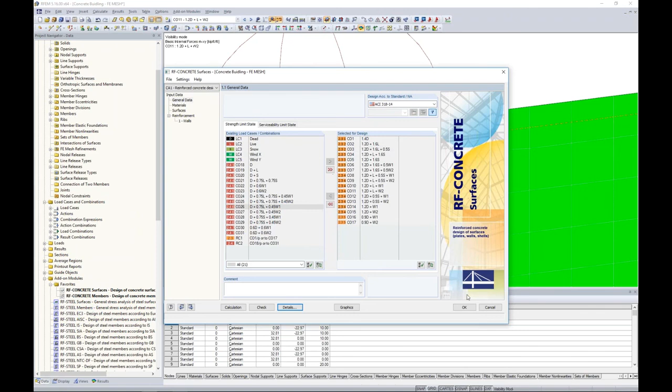So we've done that for RFEM, but keep in mind that under the RF Concrete Surfaces module, the program will still automatically use those high peak areas unless we go under the Details tab and choose this option here to apply the average internal forces for ULS and SLS calculation. Now the program will use those averaged out internal forces to do our reinforcement design, and we're ready to rerun our calculation.

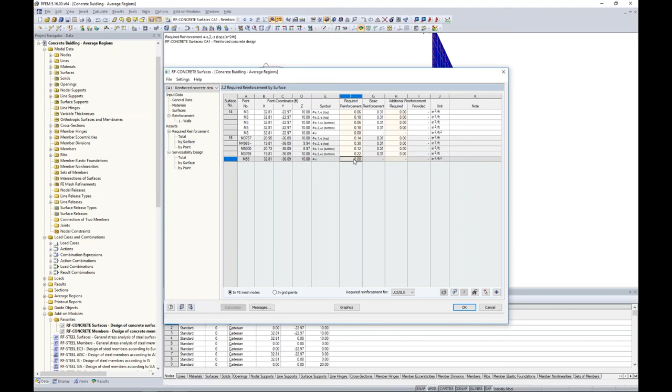I already have the results saved here within the RF Concrete Surfaces module, taking into consideration the average region, and now we can see much more realistic results for my second wall panel here. For surface number 15, here is my required reinforcement. We're no longer seeing 0.95 inches squared per foot; the greatest area we're seeing now is 0.3 inches squared per foot. Well, now my number 5s at 12 inches are completely adequate. I don't even need any additional reinforcement here. Even my shear reinforcement, I don't need any shear reinforcement. What I provided in the program is adequate. I don't have any non-designable errors telling me the entire cross-section is cracked.

Now, lastly, we can view this information graphically again, and we can take a look at the required reinforcement in the different directions. By all means, we still have these areas which have higher internal forces, which is fine. This probably stems from our rib and our panels framing into it behind this particular wall. But we're not looking at 0.95 inches squared per foot anymore; we're looking at a max of 0.3 inches squared per foot. So that is much more realistic.

Okay, so that really summarizes, I know rather quickly, member and surface design within RFEM.